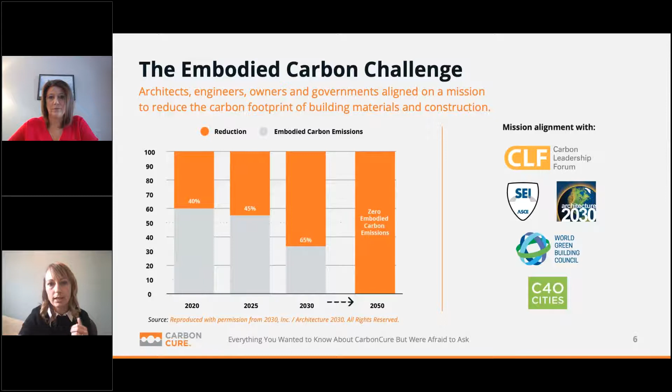CarbonCure is one of the solutions that can be used to ultimately support the industry's decarbonization. CarbonCure is CO2 utilization in concrete. So CarbonCure is an easy to adopt solution, a technology that injects CO2 into concrete during mixing. Once injected, the CO2 chemically converts into a mineral, which results in compressive strength gains. These compressive strength gains enable concrete producers to optimize mixes, which can realize cost savings as well as reduce further embodied carbon. Ultimately, the process reduces embodied carbon and creates opportunity for business growth with the design community.

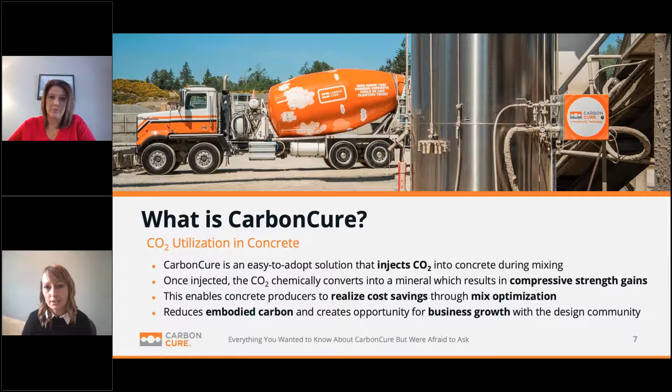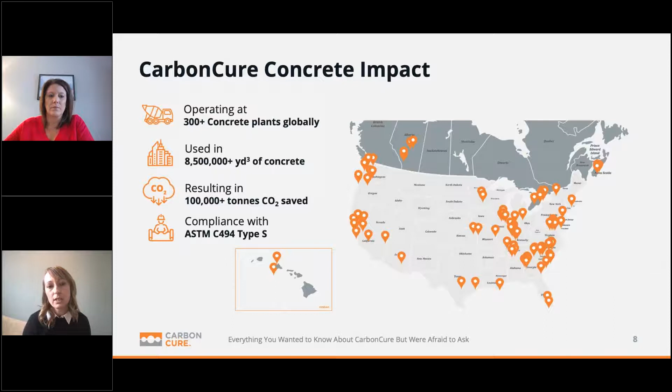To date, CarbonCure is being used in over 8.5 million cubic yards of concrete. This has resulted in over 100,000 tons of CO2 saved. Now, our mission as an organization is to achieve 500 megatons of carbon emission reductions annually with the cement and concrete sector by the year 2030. So we have a little bit of a ways to go to get there, but we're really excited by the progress that we've made so far. I will note that this technology is compliant with ASTM C494 Type S. And it has been used on a wide range of projects.

So with that, a little bit of background on CarbonCure. It's my pleasure to hand it off to Shannon, who is going to provide a more technical description of how the technology works. Shannon? Great, thanks Christy, and thanks for that introduction.

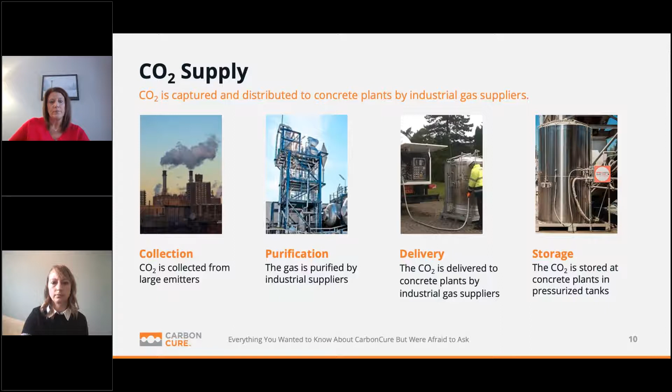So how the technology works. CarbonCure's technology delivers a precise dose of CO2 into the concrete mix, just like any other admixture. Our system is integrated with the batching software at each individual plant, which means it's communicating with that software automatically to deliver the right dose of CO2 for each concrete load that's being batched.

The CO2 itself is dosed by weight of cement. So the exact amount of CO2 will vary with different mix designs, depending on how much cement you have in those mixes. But on average, what we're injecting is about 1 pound of CO2 per yard.

This metering and injection system is actually happening during the batching process, at the exact same time as everything else in that batching sequence. So there's no impact on cycle time, and therefore no impact on your construction schedule. There's not a delay for using CO2. From an operational standpoint, CarbonCure is delivering that dose of CO2 just like any other admixture would be at your batching facility.

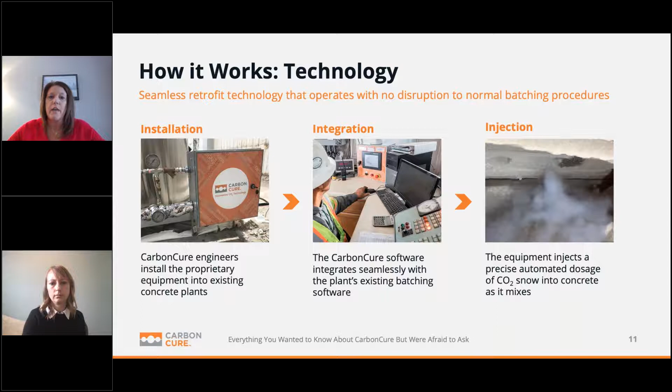This is what the CO2 looks like as it's coming out of the discharge nozzle as it's being dispersed into the concrete. It's almost like a dry ice or a snow. Now, carbonated concrete is created through what's called the reverse calcination reaction. Where calcination involves breaking that calcium carbonate mineral apart during the initial cement manufacturing process, where that CO2 gets released and becomes a greenhouse gas emission, what we're doing with reverse calcination is putting that calcium carbonate mineral back together.

So when we're injecting CO2 into the concrete, it's almost like a magnetic attraction to the calcium oxide in the cement. Those two molecules get back together in their natural state, which is a solid calcium carbonate, or limestone, mineral.

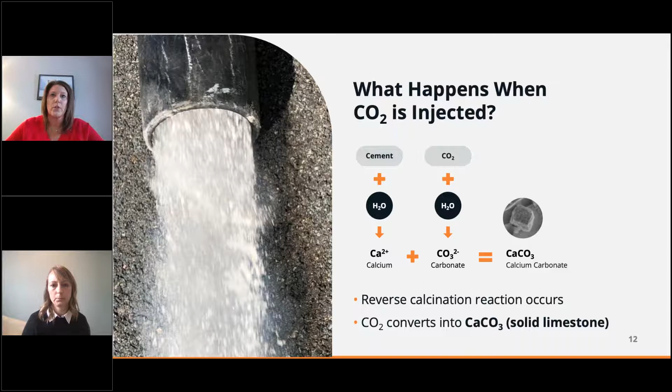But where the real value comes in, and kind of the key to all this, is when these calcium carbonate molecules are created chemically inside this concrete mix, they're very small. They're nano-sized particles that will bind to the outside of the cement grain, thereby increasing the surface area, and we're making the cement more efficient.

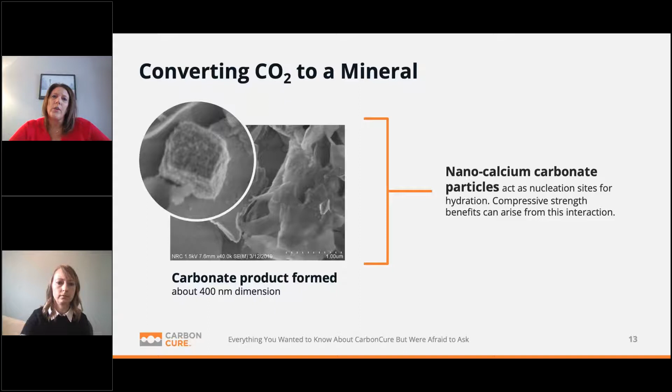So about 0.2% of the cement is going to react with that CO2 that we're injecting, and that's what forms the nanoparticles or the nanominerals, while the remaining 99.8% of the cement will continue to undergo normal hydration, but there'll be that enhanced efficiency thanks to the nanominerals. So more efficient cement means a higher strength.

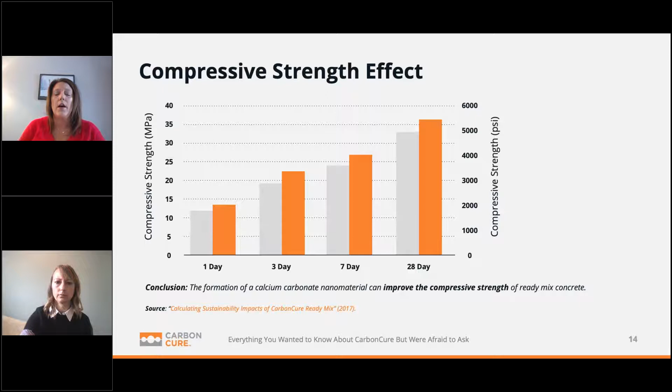So what you're seeing here, if we were to do nothing else other than take CO2 and add it to your concrete mix, that precise dose, we typically see between 3 and 7% improvement to compressive strength at 28 days. Like all things concrete, there's definitely some variability with the results, but we've seen up to 10% improvement just by adding CO2.

So what you see here in this slide, higher strength gives us the ability to adjust concrete mixes and reduce the cement content. And that's where the real value of the technology comes in, especially in relation to carbon savings, which Christy will talk about here in a bit. But what we're looking at in this example is a case study that we did, a normal concrete mix that would reach 4,000 PSI at 28 days. That's the black bar, the control mix.

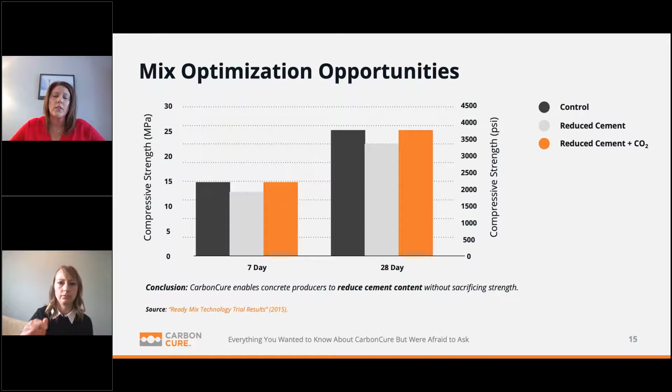The bar next to it shows that same mix with 5% cement removed. And as you can imagine, you take out cement, you're going to see a bit of a drop in strength. But then that orange bar is that same mix with the reduced cement plus the CO2. And what we're able to do is get that mix performing as it was before we took out any cement just by adding CO2.

So this is an example of an optimized mix where we're working with the QC team to identify how much cement can be removed from any particular mix while still maintaining the same mix performance and mix characteristics as they had before, which is what my team, the technical services and support team, works with the QC teams on primarily during implementation.

So other than the impact on strength, there is no measurable or noticeable impact on any fresh or hardened properties. Fresh properties, we're not impacting set time, air content, workability, anything like that. Concrete temperature is not being impacted. We get asked that question quite a bit because it's CO2, it's a cold, dry ice material that we're adding, but it's a very small amount. As I mentioned, it's on average a pound a yard. So it really does not have any impact on the temperature. And then same with hardened properties, a neutral impact on all of those as well.

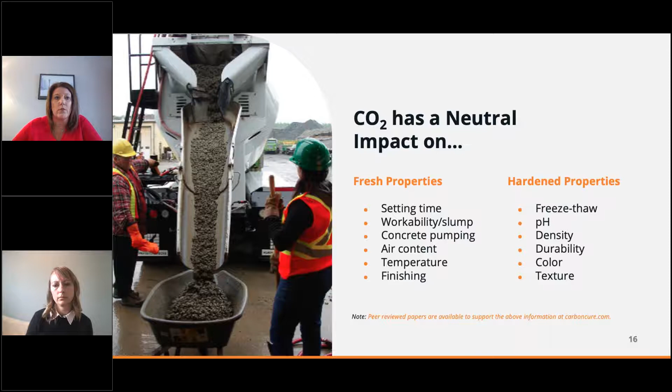There has been some pretty extensive durability testing and validation that has gone on in the past several years. State DOTs are doing some testing right now, different concrete producer verifications, third-party consultants, and ultimately all of the testing has shown that the CO2 injection process has a neutral to a positive impact on concrete durability. So worst case scenario, we're very confident saying it's neutral.

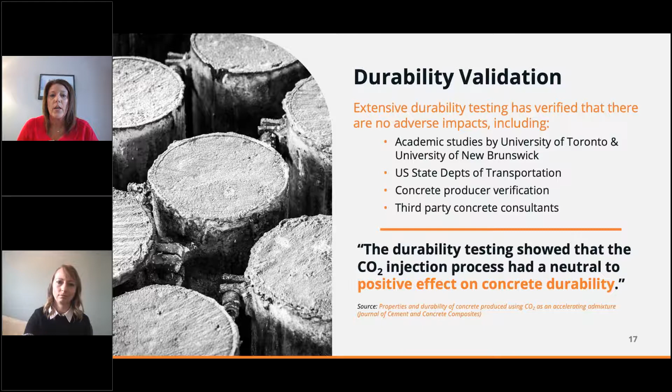But I'm going to pass it back to Christy now. She's going to talk about different market development opportunities that there are with CarbonCure. Perfect. Thanks, Shannon. I've been following the questions that have been coming in while you were speaking, and I'll address one of them right now because it leads into this.

So CarbonCure, on average, reduces about 25 pounds of CO2 per cubic yard of concrete. This really depends on the concrete mix. It can vary quite a bit based off of the amount of mix optimization that has been achieved. The carbon savings comes from two elements, from both being able to mineralize CO2 that would otherwise be a waste emission, and also by being able to reduce the cement content. So cement is responsible for the majority of the carbon impact in concrete. So by reducing cement, we're also able to achieve further carbon savings.

So to answer the question, the 100,000 tons of CO2 that has been saved to date, that is from a combination of mineralized CO2 and optimized mixes. So the market opportunity is growing rapidly, and this opportunity is stemming in many ways from this movement to reduce embodied carbon. What we're finding is that this desire to reduce carbon exists not just among the sustainable design leaders, but in almost every kind of construction project that exists, from the contractors and the building owners.

You know, if you give most people the option of saying, if all else is equal and you don't need to impact the quality or budget of the project, do you want to reduce the carbon footprint of it? The answer to that is primarily yes. And so as a result of that, we're seeing quite a bit of demand. This is an example of specification language that is popping up very rapidly in a number of different kinds of projects. You saw the reference projects I showcased earlier. There are many, many more coming down the pipeline that we will be talking about.

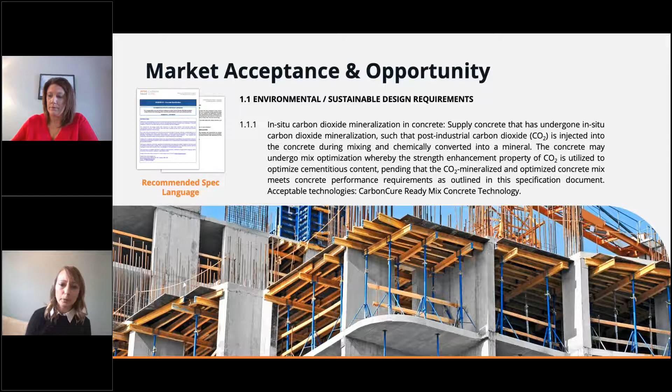The biggest challenge that we do have in this space is along the lines of prescriptive specs. And so a very common response is, well, I don't think this is going to work in my market. Is my market going to accept this? Because my market's very prescriptive. And what we mean by that is that a lot of specifications ask for a minimum cement content and/or a maximum water-cement ratio. These types of specs can inhibit the ability of a concrete producer to optimize a mix.

In other kinds of applications, particularly in the government procurement applications, we need to have approval to use CO2 within the concrete mix. And so this is a challenge that my team and I are addressing, and we're addressing it, to be honest, with quite a bit of success. There is a movement beyond simply CarbonCure to move from prescriptive to performance-based concrete specifications. This movement is supported by the NRMCA, and in fact, it's being led by the NRMCA. It's being led by structural engineers. The SE 2050 Challenge is all about best design practices and concrete specifications to enable sustainability and innovation. And ultimately, we work with our concrete partners to change the specification market within their regions, to not only enable the use of CarbonCure, but also to provide a competitive advantage for the producers that we work with.

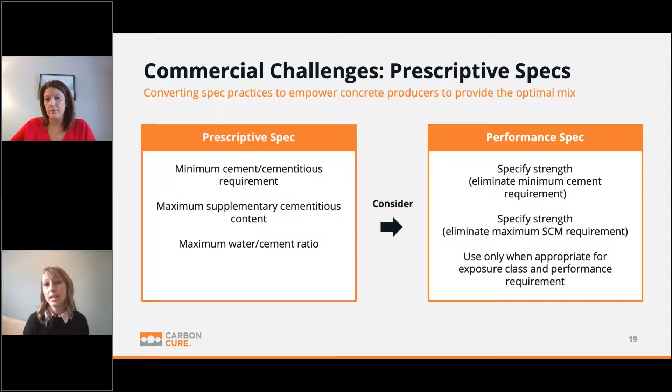And we're also working with departments of transportation and municipalities to approve the use of CarbonCure and CO2 mineralization, and also to encourage general best practices in sustainable concrete specifications. To date, the Chicago Department of Transportation, Hawaii Department of Transportation, and City of Honolulu have approved the use of CarbonCure and are actively using it in various projects. And there are a number of other government procurement organizations that are in development to do so as well.